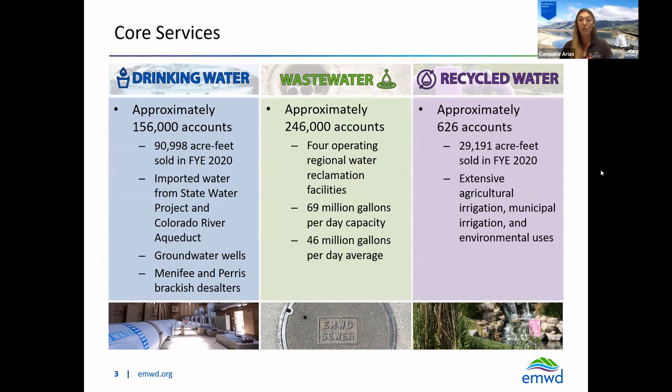So just to give you a little bit of an idea, back in 1990, we relied much more heavily on the importation of water from the Colorado River and also from up north. Since then, we've been able to expand our portfolio and utilize a lot more recycled water. We've implemented our desalters, and as a result, we've been able to use more local water for our clients.

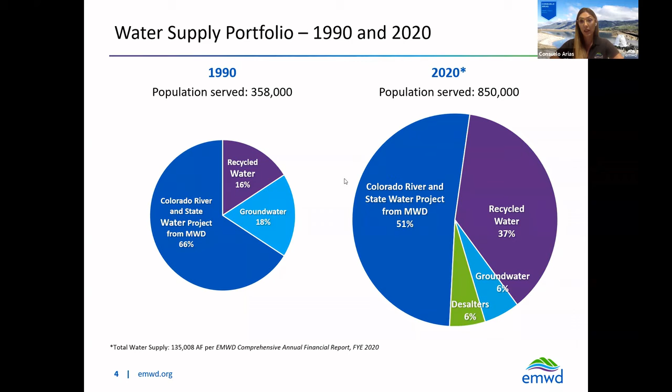I also wanted to share with you that we currently do have payment assistance programs. We have a variety of them, anything from payment arrangements, payment extensions, help to others that can potentially help pay a whole or a portion of your bill. I want to invite you to visit us at Eastern Municipal or EMWD.org, or give us a call at 1-800-426-3693 to talk to one of our representatives and see which one of these payment options might work a little bit more for you and where you're at.

And also, I did want to talk about a little bit about our Latino outreach. We're here to also provide these services in Spanish. So if you were to need any assistance, please don't hesitate to give me a call at the end of our presentation. My information will be included for you to contact me with just a simple water question or more information about our presentation and what was discussed.

And with that, I'll hand it over to you, Kevin. Thank you, Consuelo. I want to give our customers a little bit of background about what we call our Perris North groundwater program. This is a really expansive program that we've undertaken.

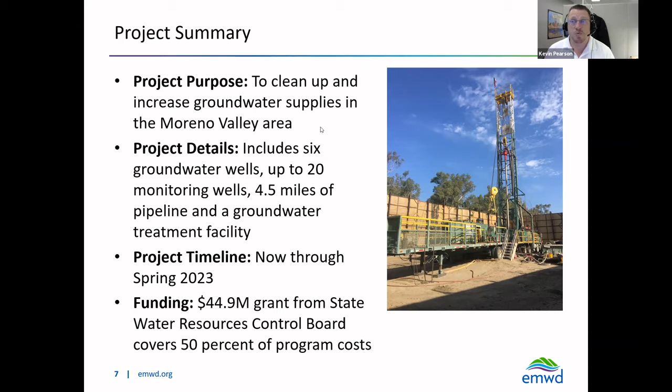So the first bit of construction that you're going to see as part of the Perris North program is what we call wells 65 and 66. These are adjacent to Ironwood Avenue, just east of Heacock Avenue, north of the freeway. Well 65, we began construction on in January. And well 66, we will begin construction on most likely next month as well. So those two should be completed with drilling probably by the April timeframe.

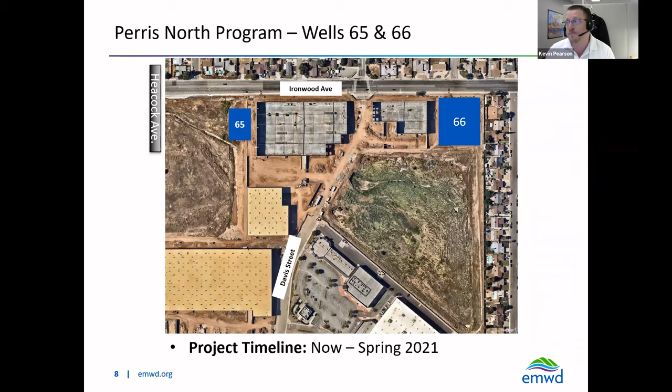And then what we will do is we actually drill the well in one phase, and then we'll come back and do the treatment and the equipping of the well with a small building on site and everything later. So you'll see some activities there well into the future, just to make sure that we have everything we need. But really the biggest impact right now is the drilling that you'll see.

Another one of our well locations is down at Perris Boulevard and Santiago Drive. And we've actually worked with the city of Moreno Valley to locate this well on the site of the city's maintenance yard. So that will be constructed sometime likely in the fall of 2021, which is our updated time frame for this location.

Another well that we will have as part of this is over at Victoriano Park on the southeastern portion of the city. We've worked with the city to identify a portion of the park that doesn't have a lot of active recreational use. So we'll be drilling a well over at that site on the park location. It will have a very small footprint in terms of the well building once everything is completed. But I know that a lot of youth and soccer teams and so forth use Victoriano Park. The well location will be away from the soccer field area over by the trees at that park. So it will be tucked out of the way to make sure the city still has active use of its recreational facilities.

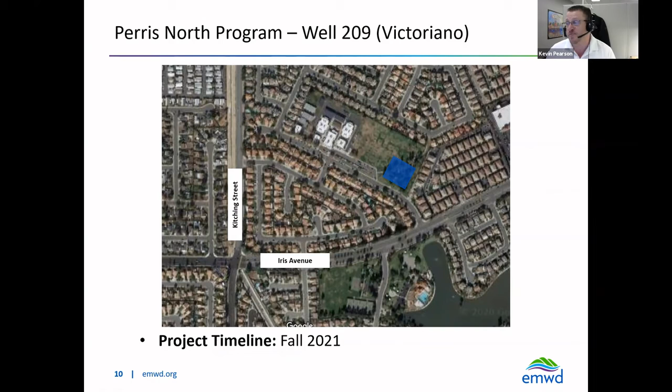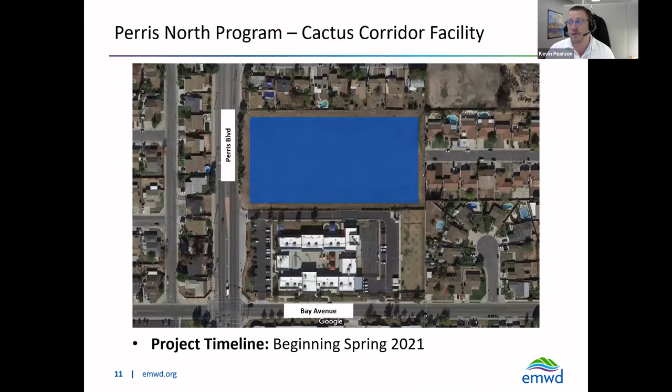The final two well locations that we're going to have are actually at one site, and it's over at Perris Boulevard, just north of Bay. And actually the building just south of us is the Riverside County Education Academy, just to give a little bit of frame of reference. But we'll have two well locations here. One will be on the northwest corner and the other will be on the southeast corner of the site. And here's actually a rendering of what that site will look like. One of the well locations is kind of at the front of the property, the other to the back.

This is also where we're going to do a lot of the treatment to clean up that groundwater from all of those different wells that we talked about earlier. We're going to have some pipelines going to these facilities, make sure we take that water supply from the ground, clean it, make sure it meets all state and federal drinking water standards, and it becomes a drinking water source for the city of Moreno Valley.

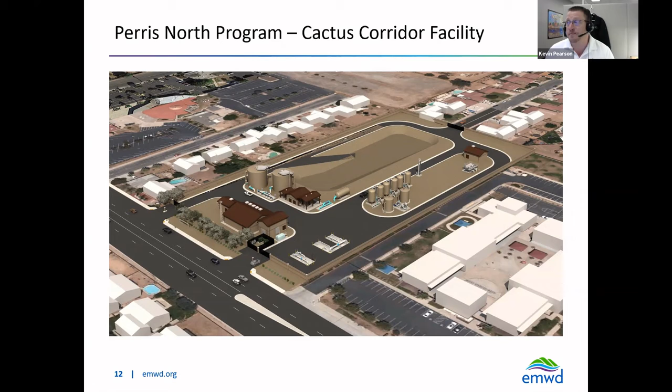So the wells that we talked about, many of them were on an individual site, and there's not a lot of community impact in terms of traffic. The well drilling is a 24-hour-a-day process when we're drilling the well. So some people who live very, very close to those sites may hear that. We have sound buffers around those project sites to really minimize any noise and impact to the community.

We will make sure we work with the city to implement traffic control so that the traffic keeps moving, so that everything is safe, and that your commute is impacted as little as possible moving forward. From pretty much Kitching Street, from Iris all the way up to Bay, is the primary pipeline alignment we'll be working in. We anticipate that pipeline will begin work likely sometime late this year, maybe early 2022.

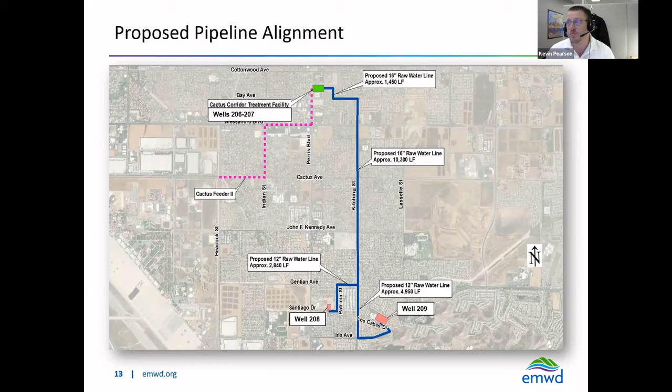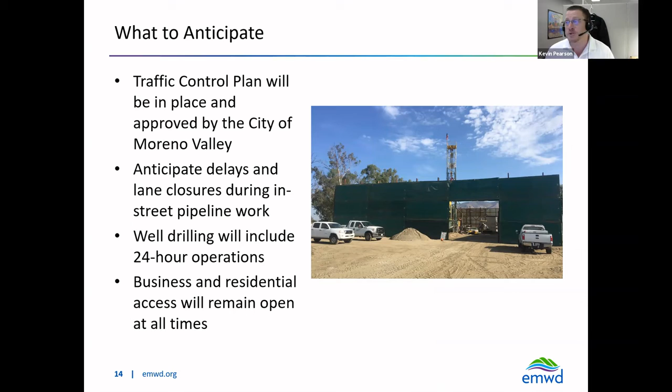Again, some of the things the community can expect during construction: we'll work with the city for traffic control measures. There may be some lane closures or delays, but we will work to minimize those as much as possible. When we are drilling the well, we do have to have periods of 24-hour work at those locations, but we'll make sure that business and residential access remains open, and that we're doing our part to be good neighbors within the community, both during and after construction. We want to be a part of your community and good neighbors throughout everything we do.

One other project coming up that many people will notice is what we call our Cactus II Pipeline project. I wanted to touch on that today so folks have an idea of what to expect in a different portion of the city. We know Moreno Valley is still seeing a lot of development activity, particularly on the east side of town. We have to have the ability to move a lot of water from our connections with Metropolitan Water District on the west side of town to the east side of Moreno Valley, to help support that future growth for both residential and commercial customers.

This project will include about 2 miles of large diameter pipeline, some of it about 3.5 feet in diameter, so we have the ability to move a lot of water from one side of the city to the other. We anticipate this project will begin construction at the very end of this year and be wrapped up sometime early 2024. This is a map of that project location.

This is the first phase of a larger project that will go all the way to the east side of Moreno Valley. This pipeline project will start at Cactus and Heacock near March Air Reserve Base, go east to Indian Street, then north to Alessandro, and then east again to Perris Boulevard, connecting into that facility we spoke about earlier near Perris and Bay. We will make sure we've got traffic control in place throughout all of this.

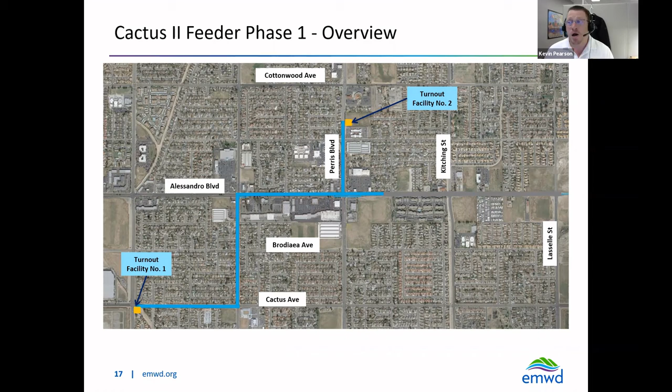We're working with the city to finalize all those traffic plans. That's a big part of our partnership with the city - when we have to do construction, we want to make sure we're doing our part to minimize the impact as much as we can. The work on Perris Boulevard will be done at nighttime. We know that's a major thoroughfare for a lot of people, so that work will be done at night to help keep traffic going and also for the safety of our crews and the community. We will keep business and residential access open throughout the entire duration of construction.